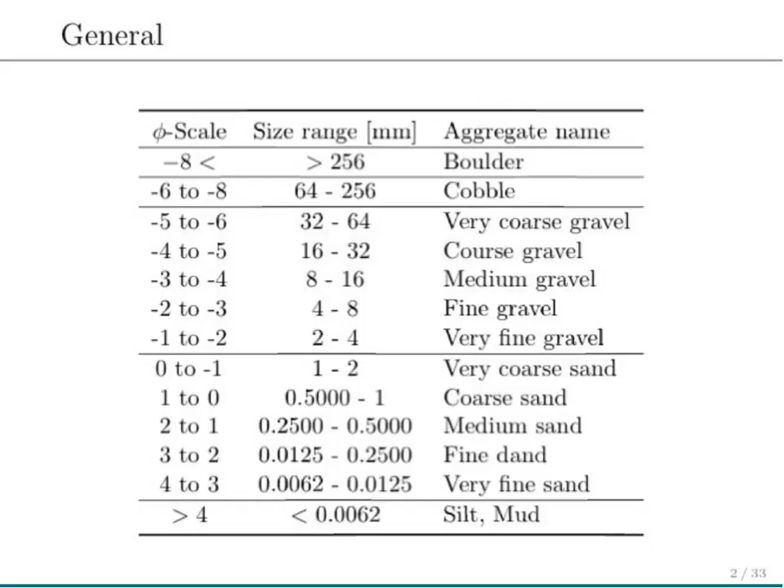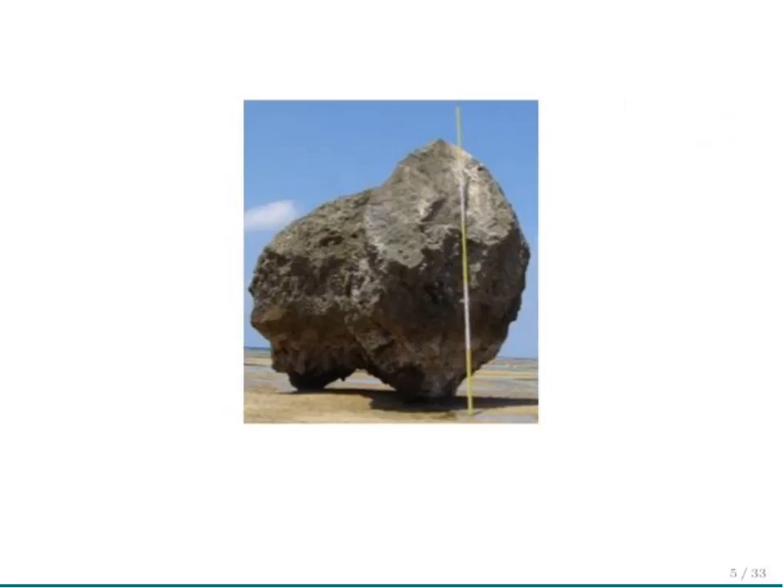And that means that if you look into improving hazard assessment or risk assessment, then we need to improve our hazard assessment. And if you look into the history of how many tsunamis, for example, how many storms occurred in the recorded past, fortunately or unfortunately, depending on what side you're on, not enough tsunamis and storms have occurred in order to come up with very meaningful statistics of it. So we need to go and interrogate the geological record for storms and tsunamis

in order to make really robust statistics. In coastlines, where both of them are sort of competing agents of change, you need to discriminate between the two records. And that's extremely difficult. And that's one of the tasks that we have, not only figuring out how many tsunamis or storms occurred in the past, but also we need to distinguish between the two, which I will tell you in a little bit is actually the bigger problem of the whole thing.

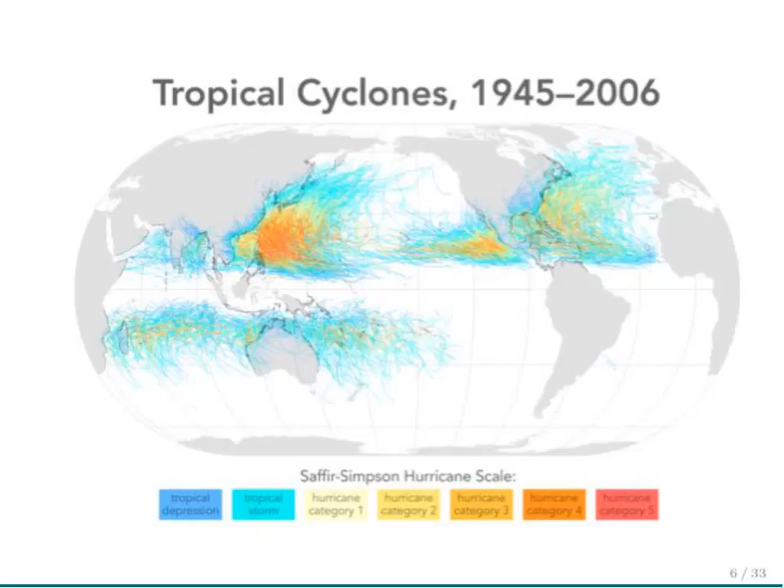So in the next few slides, I'm going to show you a very intuitive approach to our modeling software that we develop here. And so you will see a lot of circles and a lot of very simplified geometries. And I do like the circle or the sphere for theoretical reasons, because we can very simply use angles and rotation and move our normal rectangular understanding of the world into a cylinder coordinate system that allows me to simplify the equations quite a bit.

So this is the initial position of the boulder, and the boulder has a radius, and the boulder lies in front of roughness, and that prevents the boulder from rolling down that little slope. That also will prevent any given flow to move the boulder, so it provides some sort of resistance. For the boulder to move, it has to overcome this roughness here and rotate, in this very simplified view, an angle that I call theta c, a critical angle. You see here the equation that is used to do that, and the input to that critical angle is essentially the angle of the slope on which the boulder is resting, and the height of the roughness elements that is in front of it.

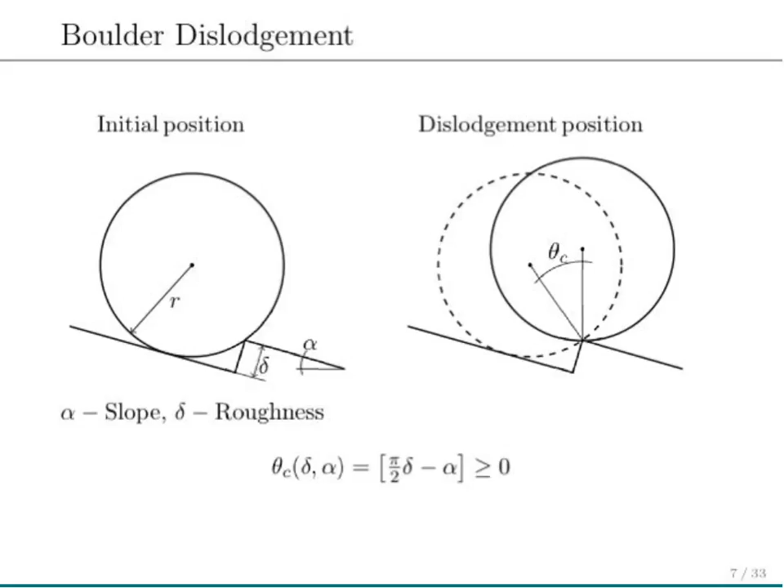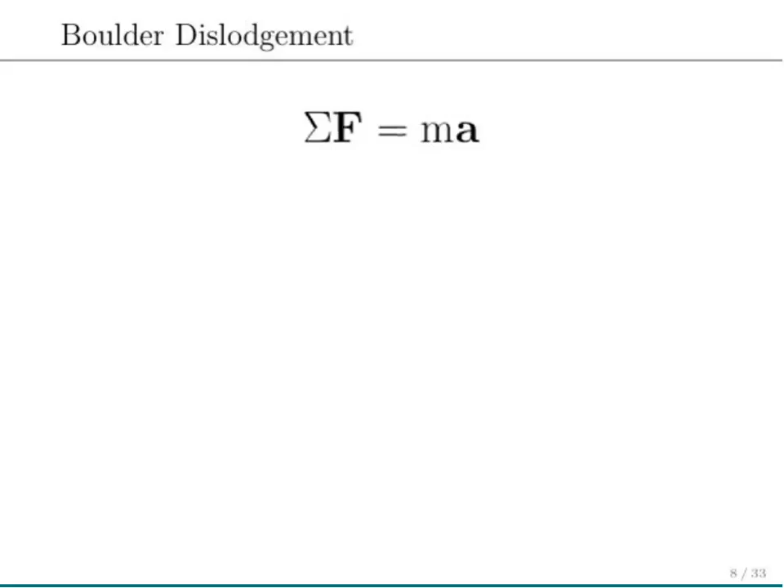So, for figuring out the equations, we go back to the old Newton's second law of motion, the sum of the forces on the left-hand side, and the reaction, the mass and the acceleration, on the right-hand side. The beauty of this approach is because we have spheres, we can rotate those spheres out, and therefore we can transform the coordinate system from a Cartesian, like our usual understanding of the world, into a very simple one. That allows us to write one equation instead of two equations for the motion of the boulder. Instead of writing an equation for x and an equation for the y direction, we only have to write an equation for theta, and that's essentially what you see.

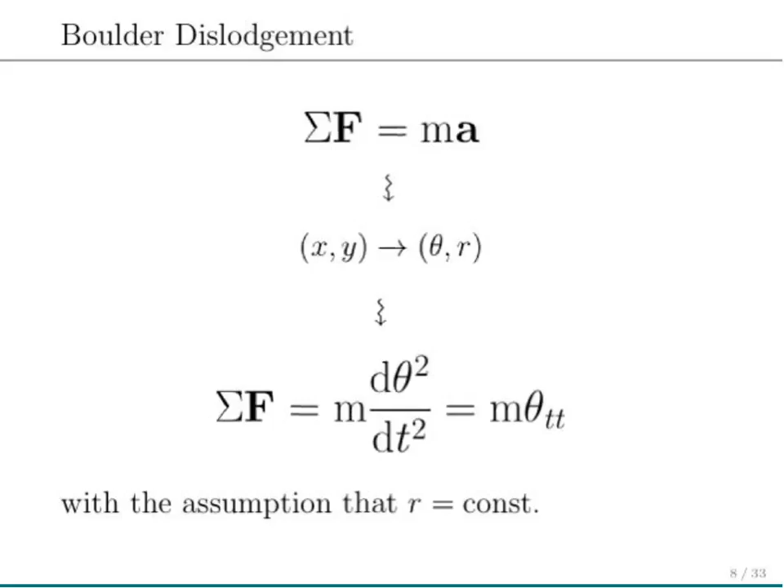So this is the acceleration of the boulder out of the pocket. And this is the sum of the forces that assumes it. And we can do that because we assume the radius of the boulder doesn't change during the motion of the boulder. On the right-hand side, because we are in water, we need to import a few things here. We need to add this to it, which essentially takes into account that the boulder has to displace the water in order to move. Then we can go further.

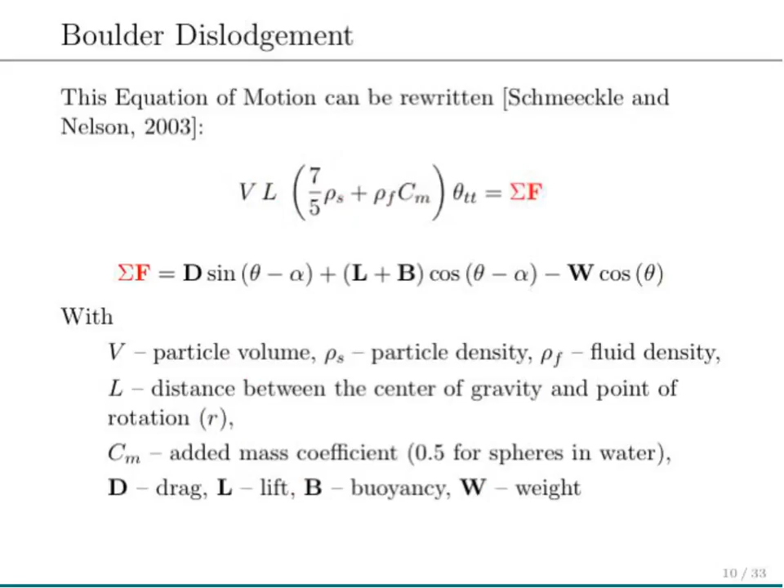On the right-hand side, we see the sum of the forces, and in very classical approaches, if that sum of the forces was larger than zero, that was used as an indicator that the boulder has moved. And that is true. If drag, lift, buoyancy, and weight, if the sum of these forces is more than zero, the boulder will move. And a little cartoon of that is presented here in the following slides.

So I assumed an angle alpha of the slope of 0, so a flat horizontal area. Delta is 1, which means that the roughness in front of the boulder is the same as the radius of the boulder. And in order for the boulder to dislodge, it has to overcome this radius and be in a position that is indicated here with the dashed circle. As you can see here, at this present stage, it hasn't moved yet, so theta is 0, and the sum of the forces is less or equal 0. So it's resting still in place. As we go forward, we see that now the boulder has moved, and the angle theta now is in between 0 and theta c.

But the sum of the forces now is larger than 0. If the driving process that generates the sum of the forces being larger than zero would go away, so that the sum of the forces will go back to 0 or less than 0, then the boulder would start moving back into its pocket again. So we couldn't even see whether the boulder moved or not.

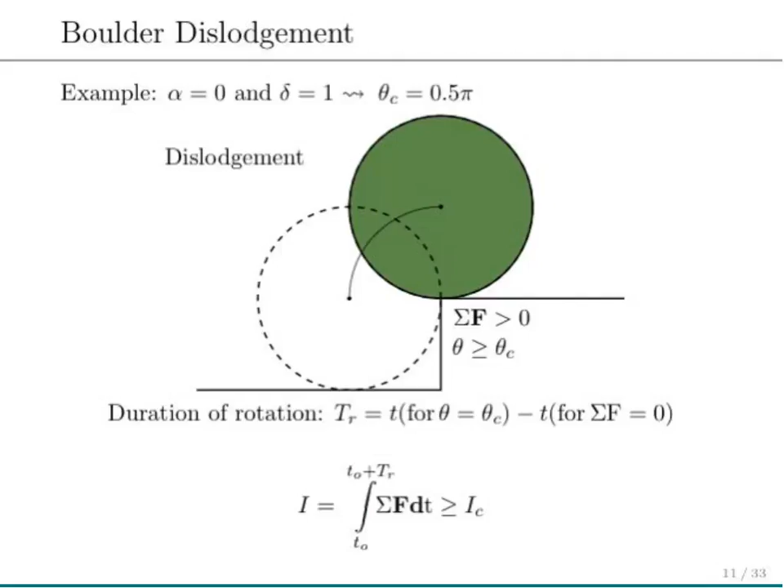And for the threshold, instead of simply the sum of the forces, we use essentially the impulse. And say if the critical impulse is exceeded, then we have boulder dislodgement, instead of just saying it's the force or the shear stress. But that's just on the side.

For the input of the respective driving forces, as in storm or tsunami, I want to present briefly a storm case. So this is our input. And you can see it's not just a single wave. Actually, we use a spectrum of waves and use a nonlinear model that transports energy across a shelf.

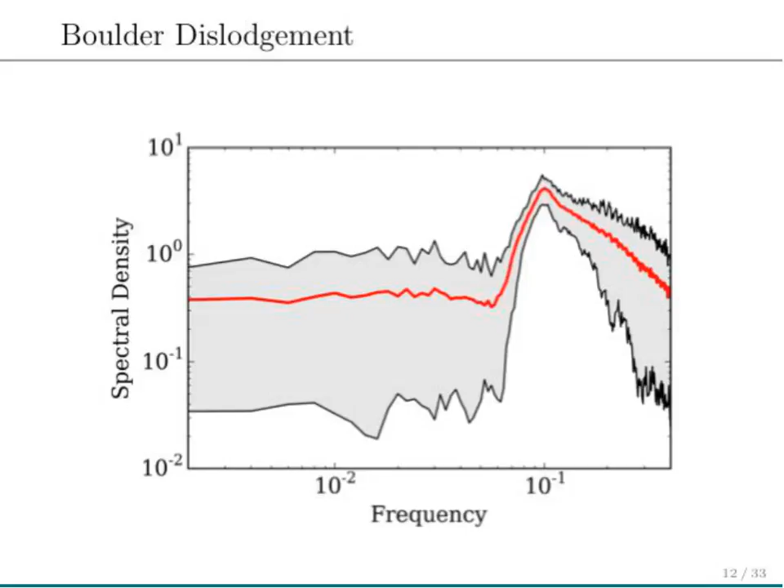So here you see the very simple geometrical setup. So it's a steady slope. It's a single slope that goes from the right side of the domain to 0 at the shore, and this is the input spectrum. So not just one single wave, but the whole wave spectrum.

And then down here, the equation, as ugly as it might look, is actually very, very beautiful, because it's physically very simple. It describes nothing else than the interaction of 3 waves with each other, and what is the resulting interaction of that. So yeah, it has an i and a minus i indicating complex numbers, but mathematically speaking, it's actually quite a bit easier to use this equation than to try to write it out in the physical domain.

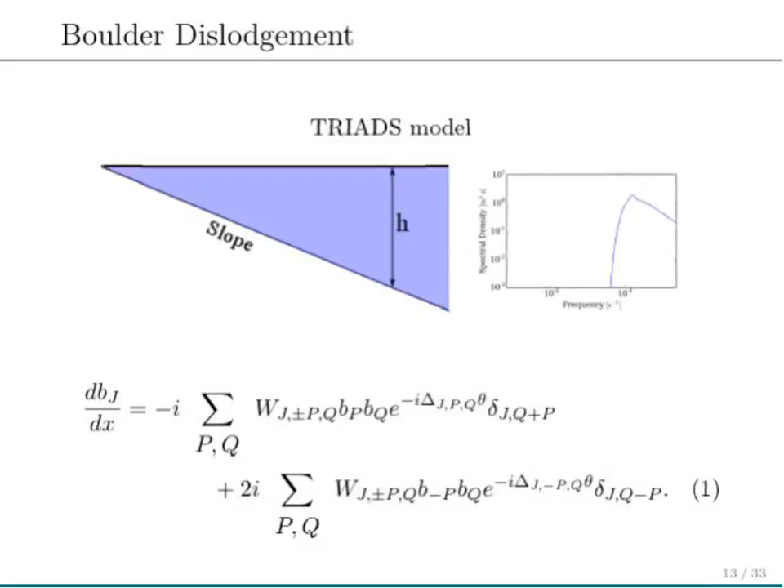So this equation works in what we call the frequency domain. So we just look at the frequency and compute the different components. So if you run this model, which is very cool, this would be a result, for example. What you see here on the left side in Figure A, the blue line is the input spectrum, the red line is the average, and indicated in the gray shade is the minimum and the maximum, or what we can expect, because we don't only have one model run, one specific spectrum.

Because it's a spectrum, we don't know exactly how the different frequencies are placed relative to each other, which means we don't have information on the phase of the waves. So we run 100 different realizations of the same spectrum and assume random relative phase shifts, so that the results can be quite different.

While the results for the main waves in this area are pretty much the same, and you can see that because the width of the gray shaded area is very narrow, in this area here it's pretty wide. So we almost have 2 orders of magnitude difference in this area between the maximum and the minimum, and that is an important piece of information.

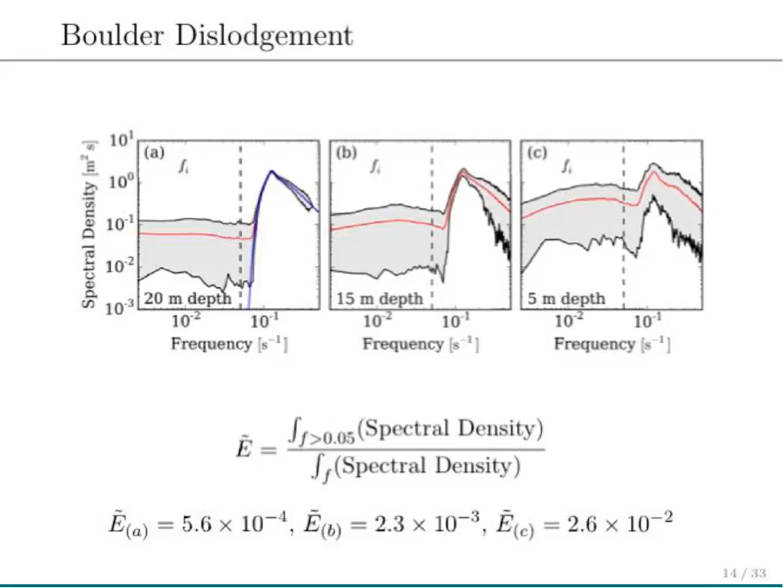So focusing on the lower ones, can I zoom in? Yeah, this is awesome. This is why I like giving talks with the iPad, because you actually can zoom in.

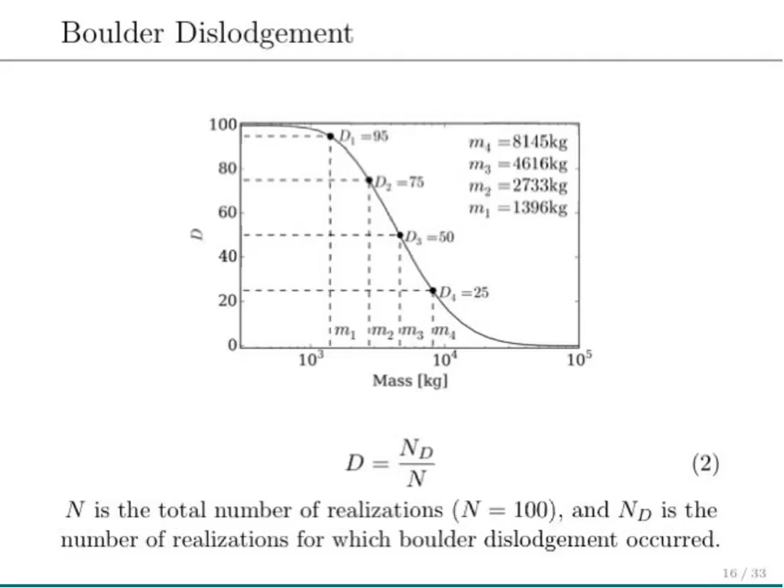So now I'm going to show you a picture that is my biggest pride. I literally implemented this into the presentation 10 minutes before this talk started, because that's when my computer finished this picture.

Let's focus on this here. What you see here is on X axis roughness, on Y we have mass, and you see three different panels in each figure, and the roughness goes for each of them from 0.1 to 1, here 2, as well. And that indicates different slope angles, for example, of the shelf or the beach. And then the different rows indicate different wave conditions in the input. So the significant wave height at the right boundary of the model would be for this location 2 meters in amplitude and 8 seconds in period.

And if you go down here, you have 8 meters in amplitude and 16 seconds in period, traveling over different slopes. The blue indicates that no boulder was moved, or fewer boulders were moved. If you are in the green-yellow area, that means 50-50: 50% of the boulders were moved, so the frequency of dislodgement is 50. And if it's red, then all the boulders were moved. So this is a three-dimensional image of the one figure that we saw in the last slide.

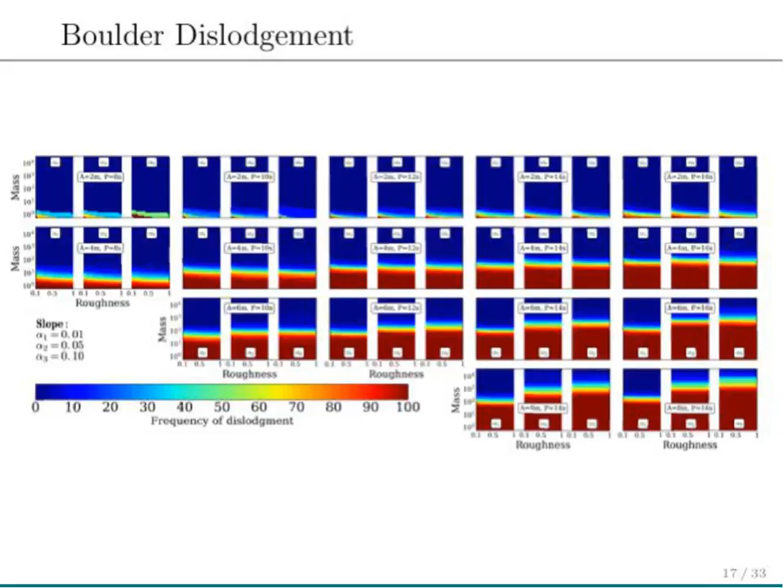Now we can take this and compare tsunamis and storms. And what you see here is what you call a comparison. So now I change this around a bit. On X is now mass, also in the log plot. So 1, 10, 100, a ton, and then 10 tons or so and more. And on Y we have now roughness from 0.1 to 1.

This ratio is the amplitude needed for a storm wave to move a boulder divided by the amplitude needed for a tsunami wave to move the same boulder. So you can see, I think that's also like a couple million runs here. I like these kinds of comparisons.

So what you see is that most of the area is blue, depending on the angle of the slope. So this is essentially a downward facing slope, and from here to here is an upward facing slope. Blue means that there's no difference between storm and tsunami. And as we go from blue to green, yellow, orange, and red, then more and more the storm wave has to be larger and larger in order to move the same boulder.

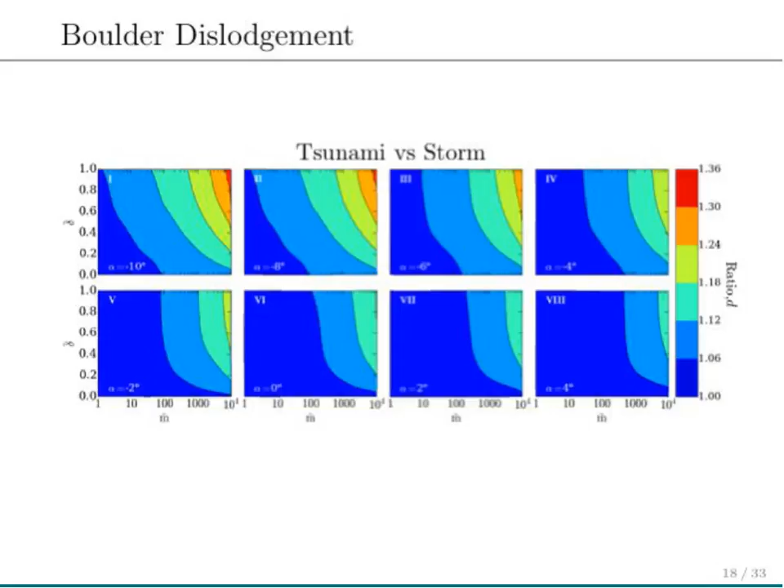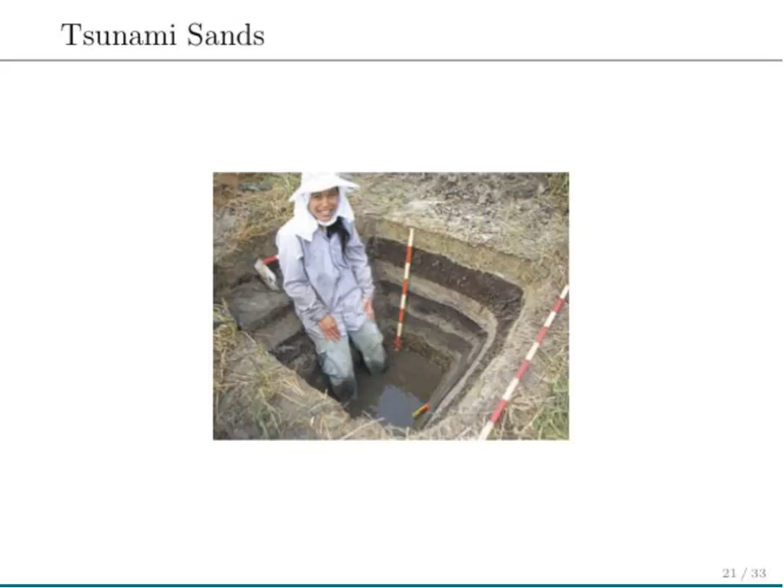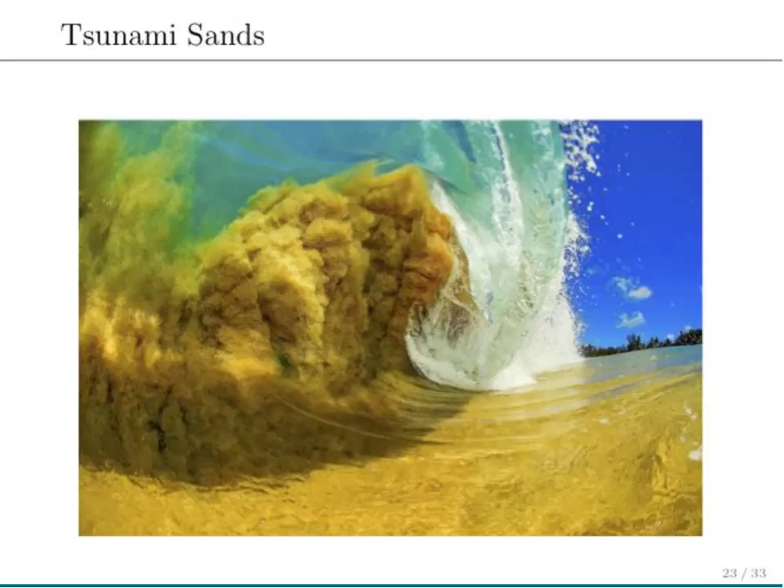And when we think about tsunami deposits, we need to think about sediments in the water column, and that makes the problem very, very difficult. When you see this, that's how you or other people think about sediment in the water column. It's nice and so forth, but that is very unquantitative. We need to quantify it, and when I think about sediment in the water column, that's what I see. It's not as pretty, but it is for me very useful for my purposes.

What you see here is a concentration profile. Essentially, this would be a concentration axis, and this is the water depth from the top to the bottom. And we have to understand that while small grains and larger grains move together in the same flow, next to each other, they are ordered in the flow very differently. Larger grains are usually closer to the bottom, and smaller grains are usually advected more in the water column. And that's how they separate, that's how they sort themselves.

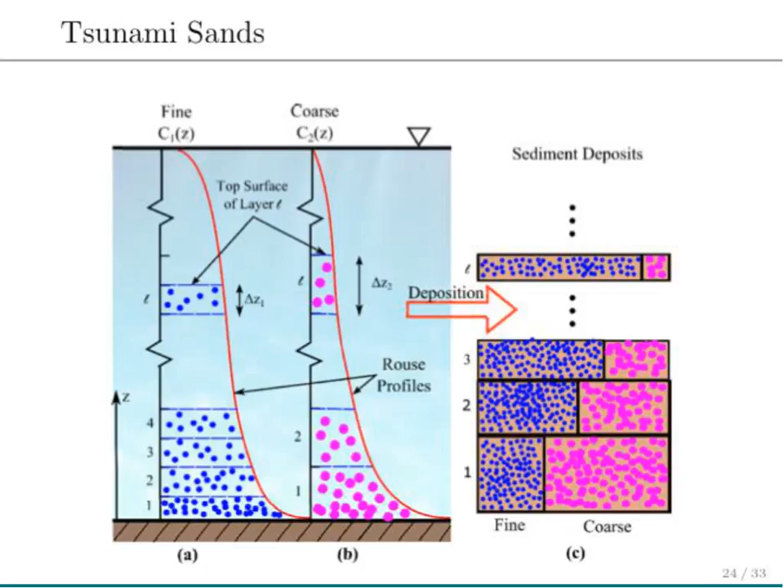And we need to take this into account in these models, and that is a very difficult problem to handle. Nonetheless, this is not the first time we do that. It's been done for a long time, maybe for 60, 70 years. So we have a good understanding of what's going on and the respective equations to deal with this. What I'm going to focus on now is how we go about inverting some important information about the causative events. In this case, I'm going to use tsunamis.

It's going away from a single value to distributions, and essentially we do Bayesian-based statistics with it, and that gives us a way to go away from sensitivity analysis towards a real, honest, and robust error and uncertainty analysis for these models. Here is a result for a transect in India. I'm unfortunately unable to pronounce the name of the location. It was deposited during the 2004 Sumatra tsunami.

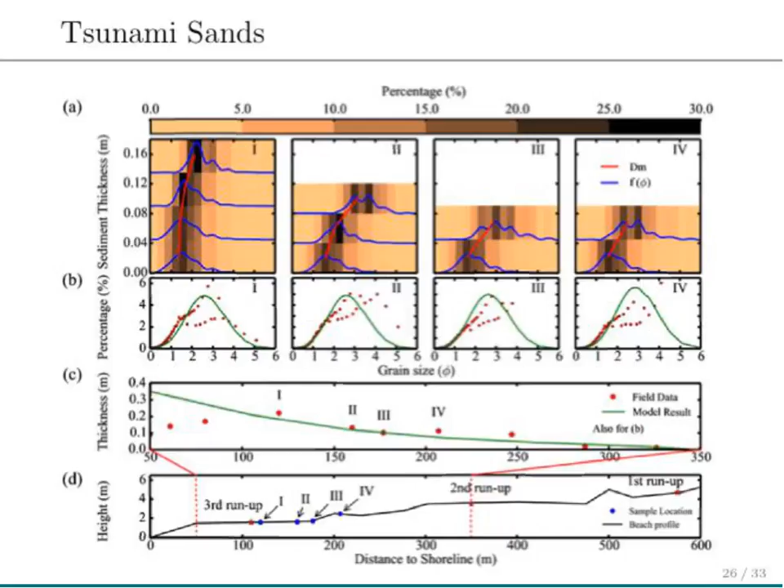measure that. If we look into the inversion results, we see that we have a velocity gradient. So this is 150 meters from the shoreline. These are the first deposits towards the shore, towards the land, and we see that the velocity decreases from about 4.7 to 3.7, and that has respective consequences for the water depth. So we can invert flow conditions and then back calculate what kind of waves will be able to produce

these calculations. What we also can do with this, and that's important as well, with these very sophisticated statistical methods, we can look at the error very honestly. In figure A, that's the error for the inversion based on different sample frequencies, meaning how many samples you take from the bottom to the top of the tsunami deposits, for the flow depth, and B, the sample frequency inverted for the flow velocity. And you see that the error is changing.

That's the error plotted here. And you see that the error is not constant. The error is minimized in a certain area. Usually, you would expect that the more samples you have, the finer you sample, the better it is, the lower your error. But that's not true because you make a lot more errors in sampling than one thinks. So that means we can determine an optimal number of samples that you need to take.

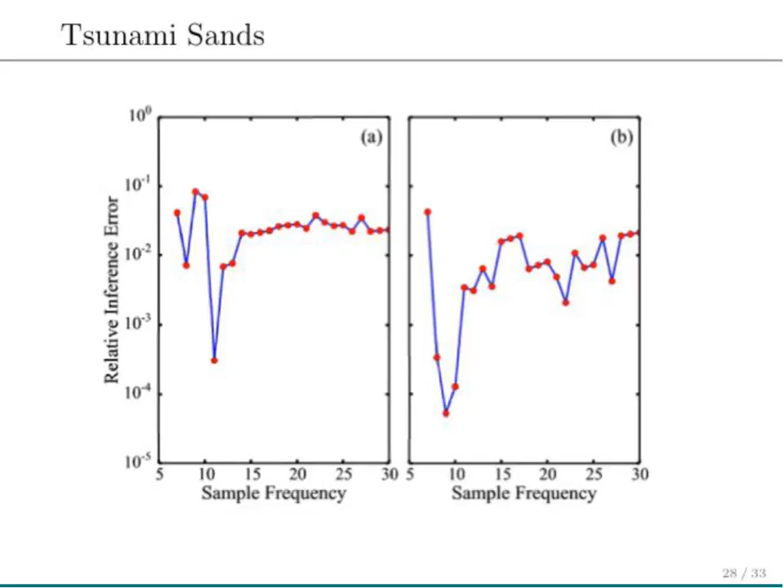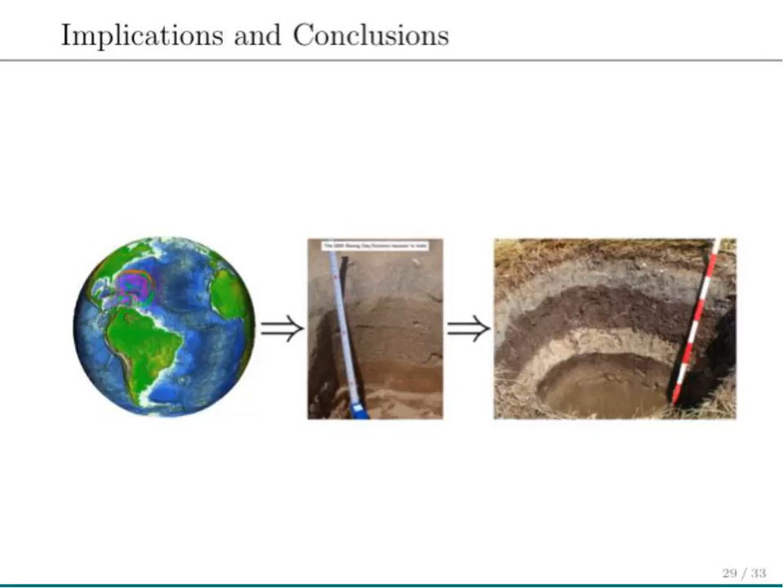But we need to get better, and we need to study this because it's not been addressed much in the literature. So I'm sort of coming to the end. I believe that studying current events is the way to understand the past. This is something that we need to do. We need to better understand sediment transport. We need to move away from deterministic models to stochastic models so that we can honestly and robustly investigate the error and uncertainties carried in the processes and in the results, in order to learn more about the tsunami deposits that we find in the past.

We have such models, and that's an example from one of my students that he gave me this morning, actually, for the 2004 tsunami in Kuala Meurisi in Indonesia. What you see here in A is the water level that they measured offshore, here's the 1D bathymetry, and this is sort of a model result here. I cannot zoom in more, unfortunately, but you see here the topography before, and then the sediment and so forth.

Interesting here, though, is D, where we have in red the field data, plotted against distance, and on Y is the thickness of the deposit, the darker gray area in figure B. In the dashed green line you see earlier results with Delft 3D, which is one of the standard models for sediment transport. In red and blue is our model, and it might be my subjective mind, but I think we do a little better than what Delft 3D has done here.

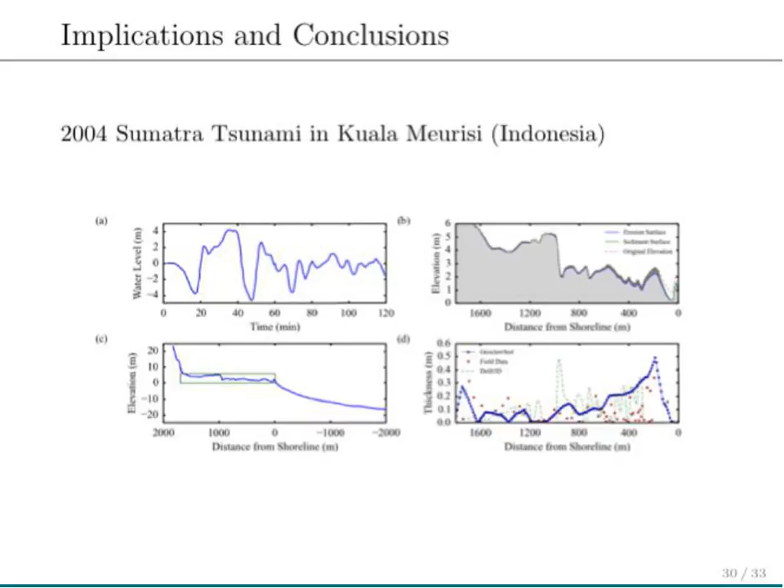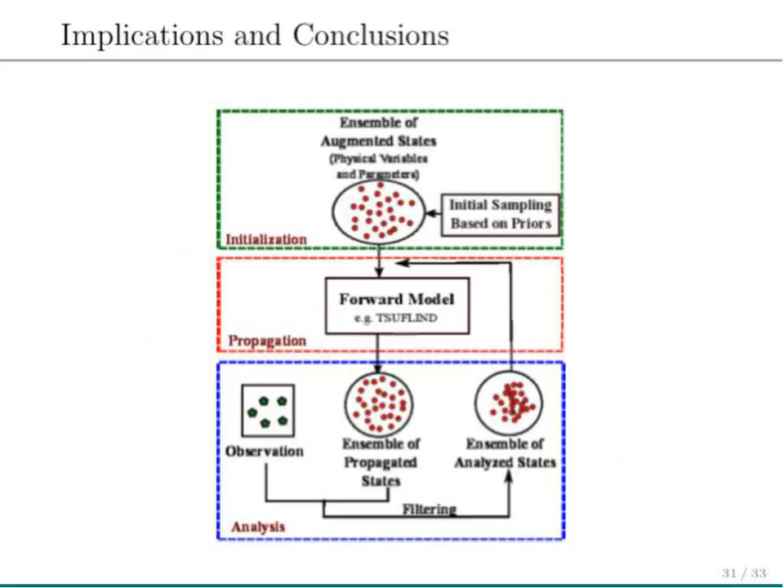what I want you to take home essentially is that tsunamis and storms are often competing processes or agents of coastal destruction, especially in the areas where storms and tsunamis obviously occur at the same time, or could occur at the same time. And then we need to move away, theoretically in the models, and also in our understanding and our communication about this. We need to move away from process-oriented deterministic models, meaning the waves move one boulder or something like that. We need to go, and especially with sediment transport, we need to consider it stochastically.

That allows us to do much more with it, and especially, and I point this out again, an honest and robust error and uncertainty analysis is very, very important in order to know how much we can trust the inversion results, and how much, in the end, we can trust the hazard assessment that we see published. Again, that's the point: stochastic approaches allow for an unbiased quantification of uncertainties and error.

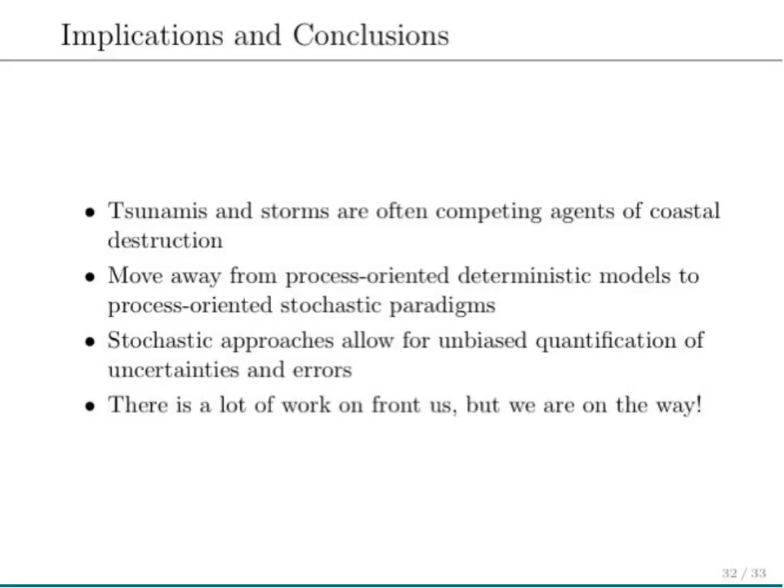And lastly, there's a lot of work ahead of us, but we're on the way, and we've made incredible progress over the past 2 or 3 years, especially with the availability of computational power. This has become an incredible and interesting journey. And with that, I thank you and invite questions.